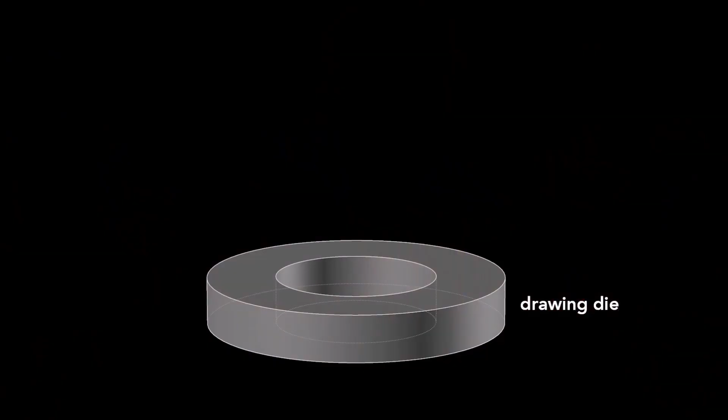The first step starts with a drawing die, on which sits the blank and then a blank holder that rests on top. We'll look at a slice of the die so we can see what's happening. A cylindrical punch presses down on the blank, forming the blank into a cup. This process is called drawing.

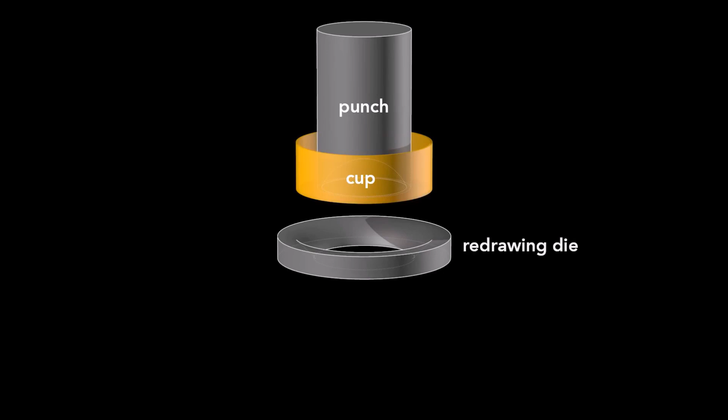This cup is about 88 millimeters in diameter, larger than the final can, so it's redrawn. That process starts with this wide cup and uses another cylindrical punch and a redrawing die. The punch presses the cup through the redrawing die and transforms it into a cup with a narrower diameter, which is a bit taller.

This redrawn cup is now the final diameter of the can, 65 millimeters, but it's not yet tall enough. A punch pushes this redrawn cup through an ironing ring. The cup stays the same diameter as it becomes taller and the walls thinner.

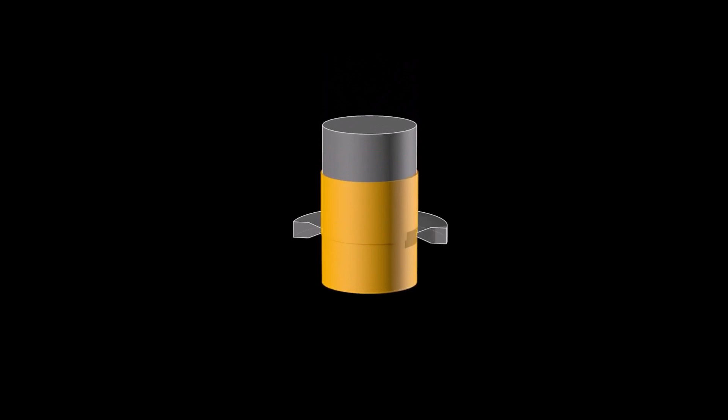If we watch this process again up close, you see the initial thick wall and then the thinner wall after it's ironed. Ironing occurs in 3 stages, each progressively making the walls thinner and the can taller.

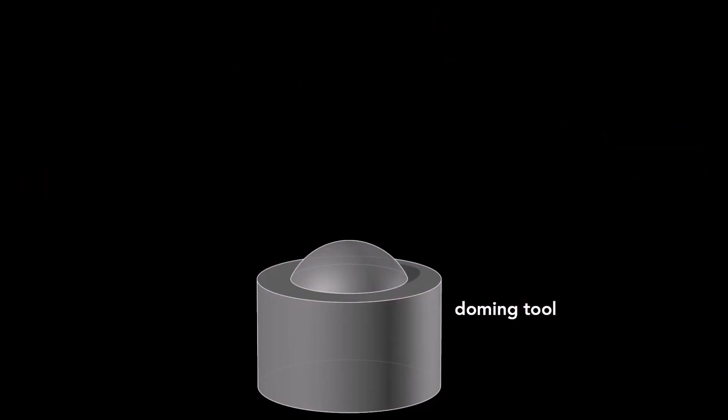After the cup is ironed, the dome on the bottom is formed. This requires a convex doming tool and a punch with a matching concave indentation. As the punch presses the cup downward into the doming tool, the cup bottom then deforms into a dome.

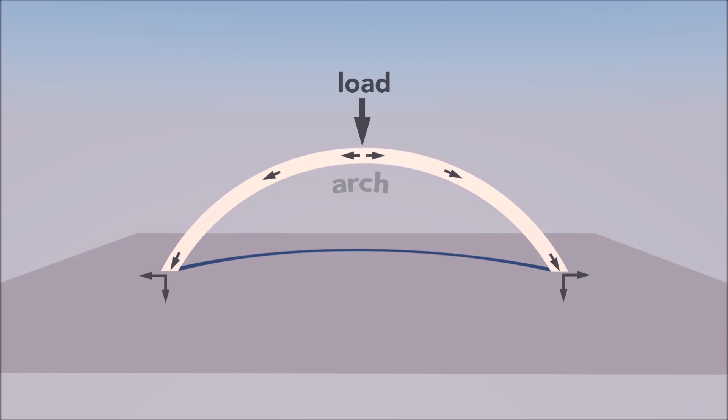That dome reduces the amount of metal needed to manufacture the can. The dome bottom uses less material than if the bottom were flat. A dome is an arch revolved around its center. The curvature of the arch distributes some of the vertical load into horizontal forces, allowing a dome to withstand greater pressure than a flat beam.

On the dome, you might notice 2 large numbers. These debossed numbers are engraved on the doming tool. The first number signifies the production line in the factory, and the second number signifies the body maker number. The body maker is the machine that performs the redrawing, ironing, and doming processes. These numbers help troubleshoot production problems in the factory.

In that factory, the manufacturing of a can takes place at a tremendous rate. These last 3 steps, redrawing, ironing, and doming, all happen in one continuous stroke and in only 1/7 of a second. The punch moves at a maximum velocity of 11 meters per second and experiences a maximum acceleration of 45 Gs. This process runs continuously for 6 months, or around 100 million cycles, before the machine needs servicing.

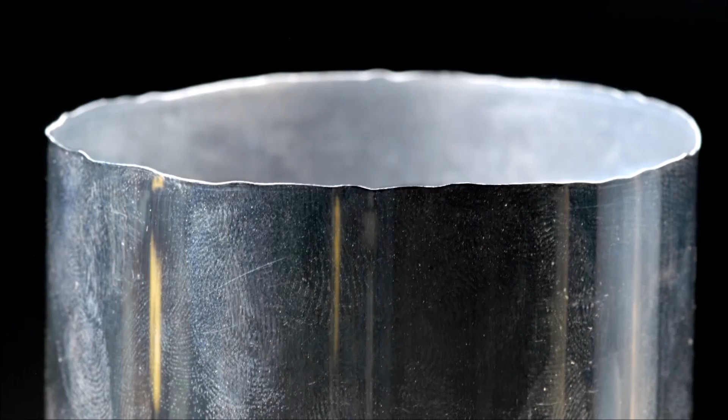Now, if you look closely at the top of the can body, you see that the edges are wavy and uneven. These irregularities occur during the forming. To get a nice, even edge, about 6 millimeters is trimmed off of the top. With an even top, the can can now be sealed.

But before that sealing occurs, a colorful design is printed on the outside. The term of art in the industry is decoration. The inside also gets a treatment. A spray-coated epoxy lacquer separates the can's contents from its aluminum walls. This prevents the drink from acquiring a metallic taste and also keeps acids in the beverage from dissolving the aluminum.

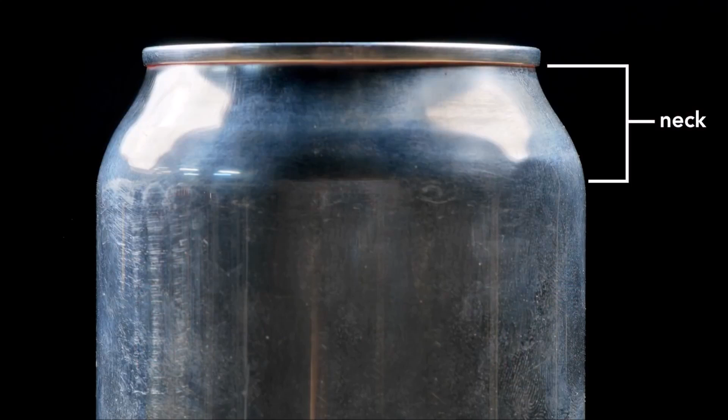The next step forms the can's neck, the part of the can body that tapers inward. This necking requires 11 stages. The forming starts with a straight-walled can. The top is brought slightly inward, and then this is repeated further up the can wall until the final diameter is reached. The change in neck size at each stage is so subtle that you can barely tell a difference between one stage and the next.

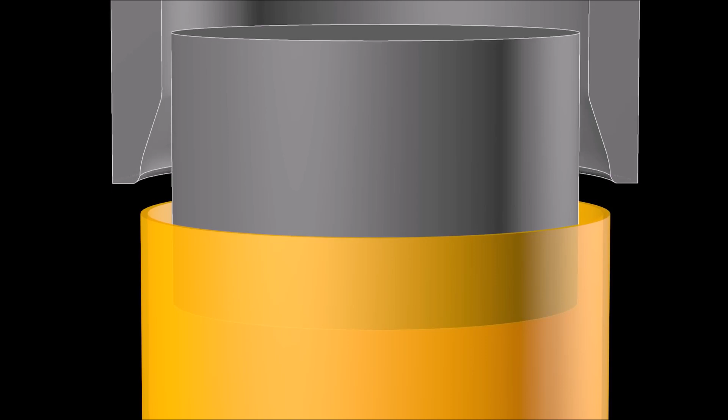Each one of these stages works by inserting an inner die into the can body, then pushing an outer die, called the necking sleeve, around the outside.

The necking sleeve retracts, the inner die retracts, and the can moves to the next stage. The necking is drawn out over many different stages to prevent wrinkling or pleating of the thin aluminum.

Since the 1960s, the diameter of the can end has become smaller by 6 millimeters, from 60 millimeters to 54 millimeters today. This seems a tiny amount, but the aluminum can industry produces over 100 billion cans a year, so that 6 millimeter reduction saves at least 90 million kilograms of aluminum annually. That amount would form a solid cube of aluminum 32 meters on a side. Compare that to a 787 Dreamliner with a 60-meter wingspan.

Now, after the neck has been formed, the top is flanged. That is, it flares out slightly and allows the end to be secured to the body, which brings us to the next brilliant design feature, the double seam.

On older steel cans, manufacturers welded or soldered on the ends. This often contaminated the can's contents. In contrast, today's cans use a hygienic double seam, which can also be made faster. This can is cut in half so you can see the cross-section of the double seam.

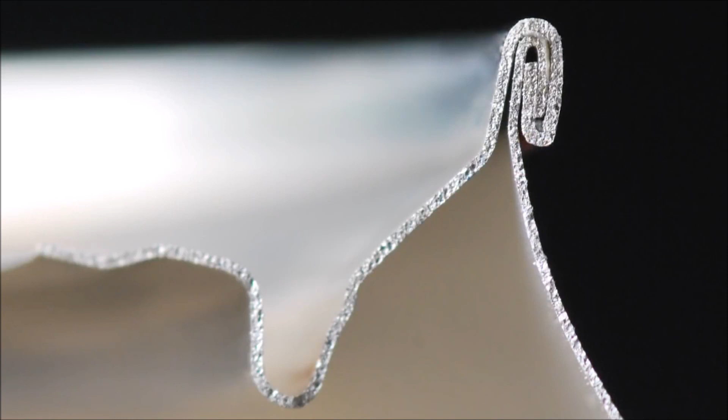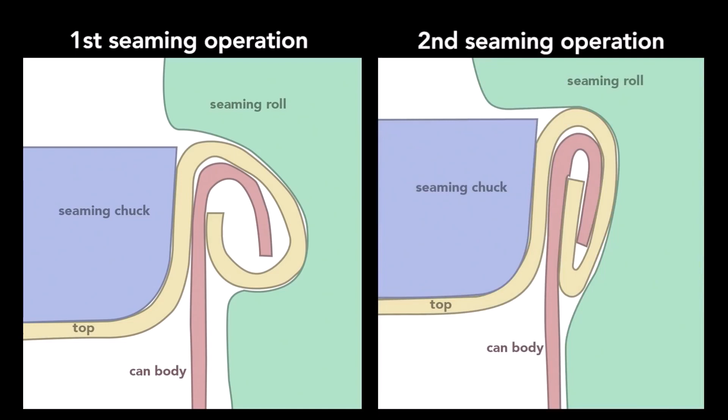To create this seam, a machine uses two basic operations. The first curls the end of the can cover around the flange of the can body. The second operation presses the folds of the metal together to form an airtight seal. While the operations themselves are simple, they require high precision. Parts misaligned by a small fraction of a millimeter cause the seam to fail.

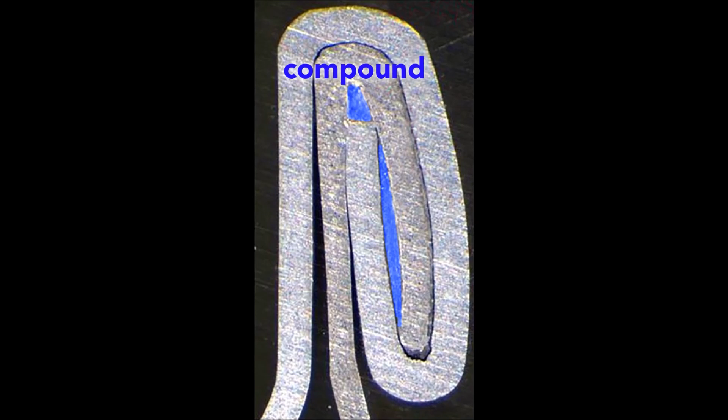In addition to the clamping of the end and can body, a sealing compound ensures that no gas escapes through the double seam. The compound is applied as a liquid, then hardens to form a gasket. The end, attached immediately after the can is filled, traps gases inside the can to create pressures of about 30 psi, or 2 times atmospheric pressure.

In soda, carbon dioxide produces the pressure. In non-carbonated drinks like juices, nitrogen is added. So why is a beverage can pressurized? Because the internal pressure creates a strong can despite its thin walls.

Squeeze a closed, pressurized can, it barely gives. Then, squeeze an empty can. It flexes easily. The can walls are thin, only 75 microns thick, and they're flimsy. But the internal pressure of a sealed can pushes outwards equally and so keeps the wall in tension.

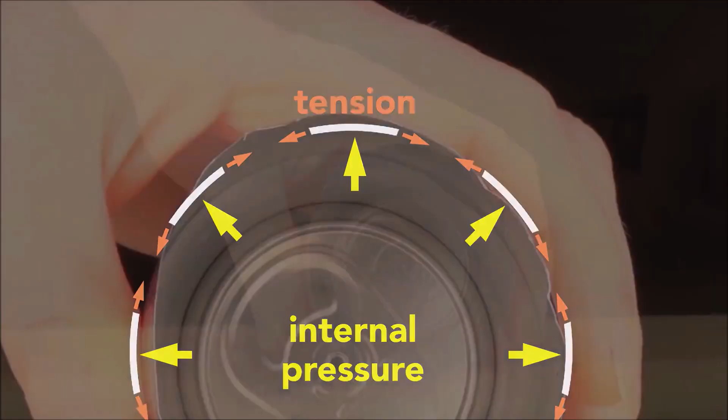This tension is key. The thin wall acts like a chain. In compression, it has no strength, but in tension, it's very strong. The internal pressure strengthens the cans so that they can be safely stacked. A pressurized can easily supports the weight of an average human adult. It also adds enough strength so that the can doesn't need the corrugations like in this unpressurized steel food can.

While initially pressurized to about 2 atmospheres, a can may experience up to 4 atmospheres of internal pressure in its lifetime due to elevated temperatures, and so the can is designed to withstand up to 6 atmospheres or 90 psi before the dome or the end will buckle.

Why is there a tab on the end of the can? It seems a silly question. How else would you open it? But originally, cans didn't have tabs. Very early steel cans were called flat tops for pretty obvious reasons. You use a special opener to puncture a hole to drink from and a hole to vent.

In the 1960s, the pull tab was invented so that no opener was needed. The tab worked like this. You lift up this ring to vent the can and pull the tab to create the opening. Easy enough, but now you've got this loose tab.

The cans ask you to please don't litter, but sadly these pull tabs got tossed on the ground where the sharp edges of the tabs cut the bare feet of beachgoers or they harmed wildlife. So the beverage can industry responded by inventing the modern stay-on tab.

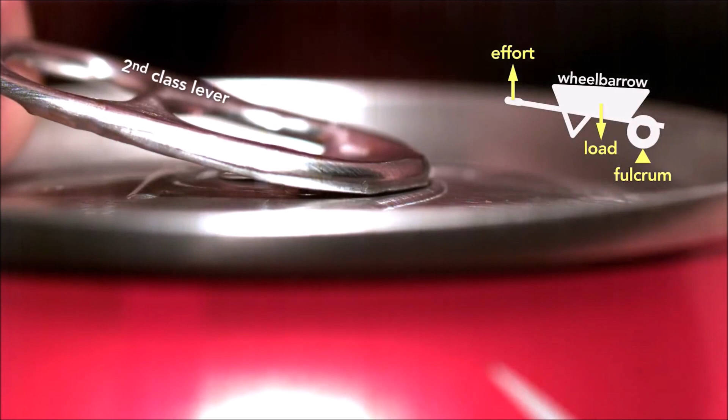This little tab involved clever engineering. The tab starts as a second-class lever, like a wheelbarrow, because the tip of the tab is the fulcrum and the rivet is the load. The effort is being applied on the end.

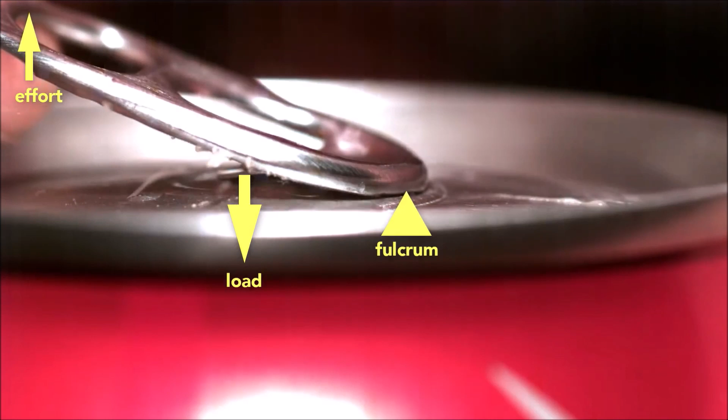But here's the genius part. The moment the can vents, the tab switches to a first-class lever, which is like a seesaw, where the load is now at the tip and the fulcrum is the rivet.

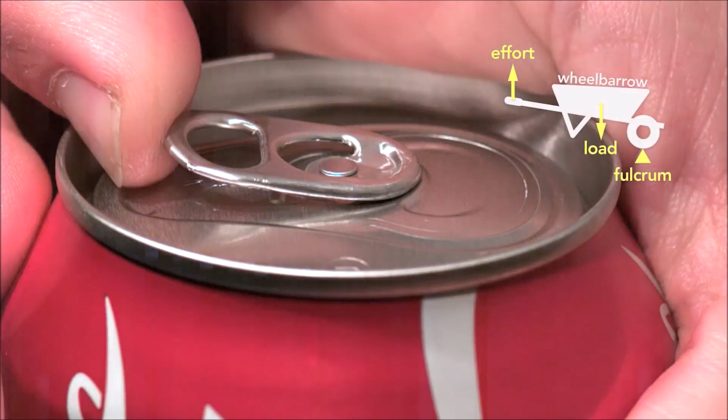You can see clearly how the tab, when working as a wheelbarrow, lifts the rivet. Part of the reason this clever design works is because the pressure inside the can helps force the rivet up, which in turn depresses the outer edge of the top until it vents the can, and then the tab changes to a seesaw lever.

Looking from the inside of the can, you can see how the tab first opens near the rivet. If you tried to simply force the scored metal section into the can using the tab as a first-class lever, with the rivet as the fulcrum throughout, you'd be fighting the pressure inside the can. The tab would be enormous and expensive.

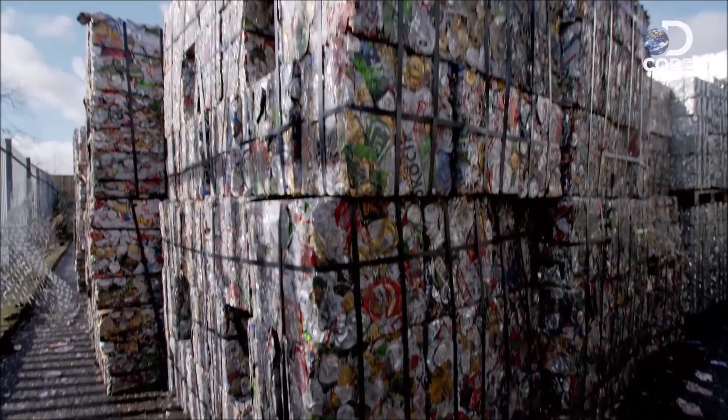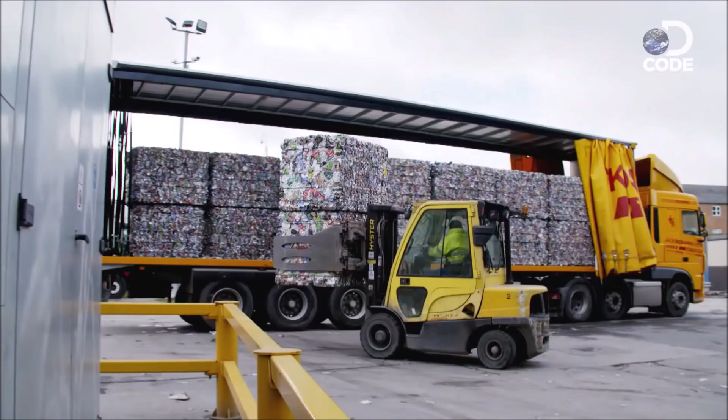Novelis is the world's largest recycler of used beverage cans. They arrive at its factory in Warrington, England from all over the world, compressed into bales, each weighing up to 1,000 kilograms and containing as many as 65,000 aluminium cans.

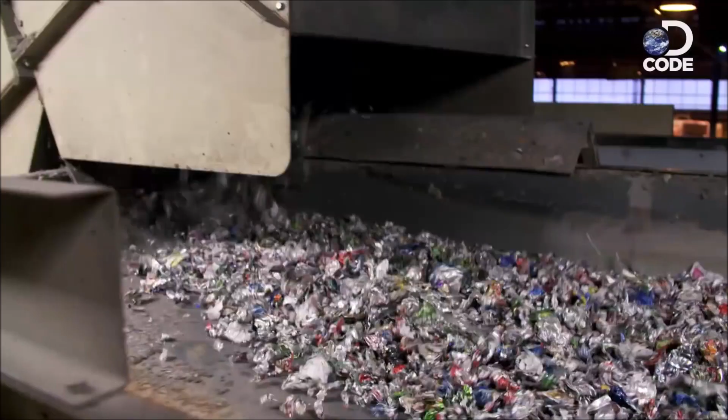The bales of compressed cans are loaded onto a conveyor and fed into a 340 horsepower shredder. Aluminium is tricky to sort because, unlike some metals, it can't be separated out with a magnet.

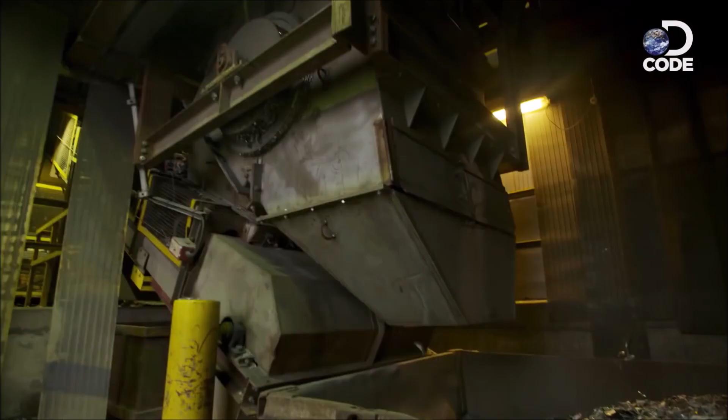So next, the shredded scrap passes through an optical sorter at a rate of 3 meters per second. The machine uses infrared sensors to sort out what's metal and what isn't, then blasts away any plastic or glass with jets of air. A powerful magnet sucks up any scraps of steel, leaving just aluminium.

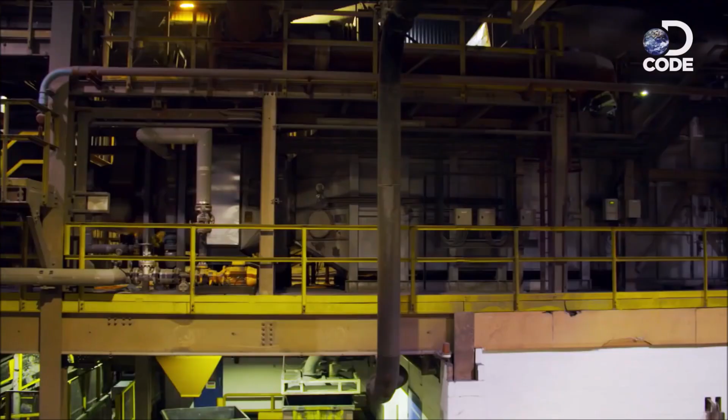The next problem is aluminium doesn't melt until 660 degrees. The paint and lacquer aren't so lucky - they're instantly vaporized. Then the clean aluminium chips are ready for the next stage, melting.

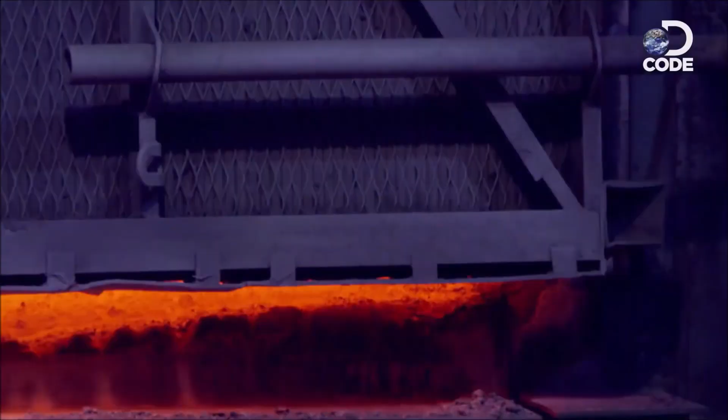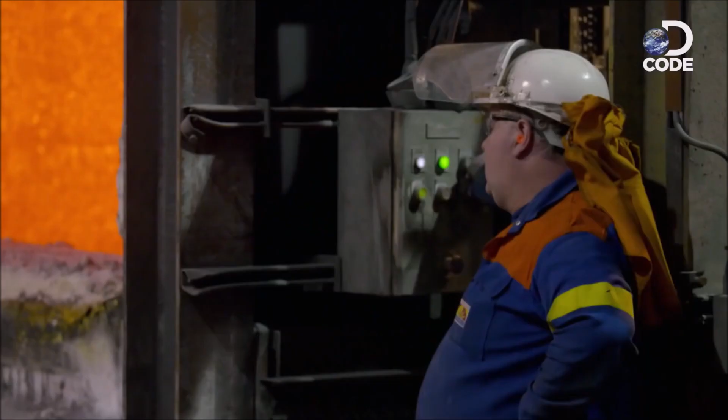Two furnaces hit a blistering 730 degrees and handle up to 100 tons of aluminium each. The trouble is, when the aluminium melts, it reacts with air, forming a layer of aluminium oxide that floats on top.

This unwanted oxide is known as dross. A brave furnace operator skims it off with a giant steel spatula. And the alloy is ready for the casting area.

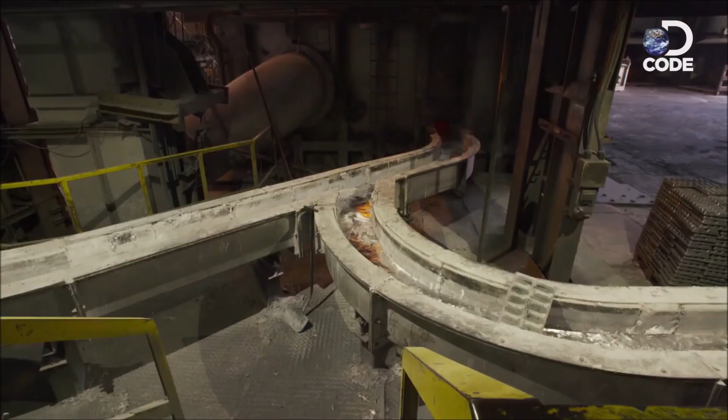The only problem is getting there. A river of molten metal flows downhill to a holding furnace that's the size of a double-decker bus. Somehow, they need to pour the liquid metal into a mould. Remarkably, the solution is to tip the entire furnace.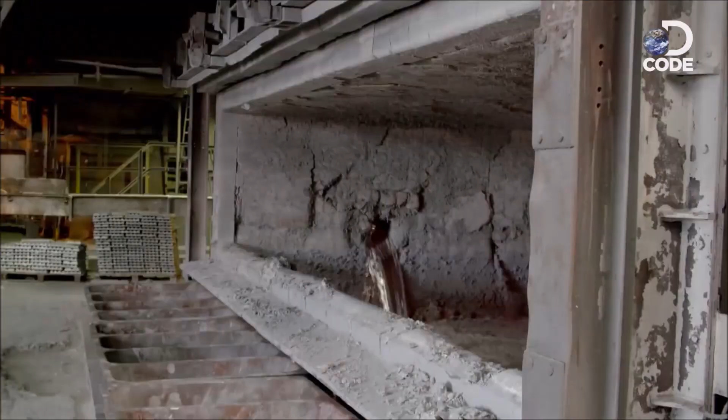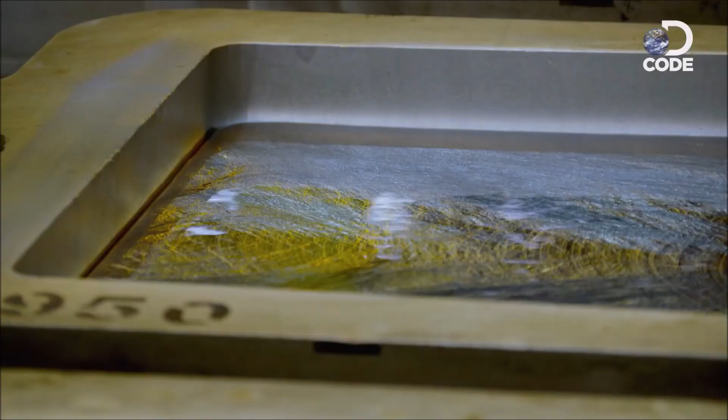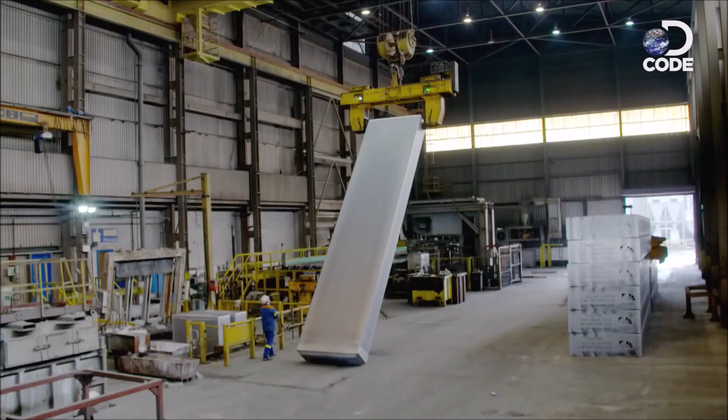A fountain of deadly metal pours into one of 3 moulds set 10 metres into the ground. Inside, they will be cast into 3 towering blocks of aluminium. After 2.5 hours, they have 3 giant aluminium monoliths, called ingots. Each one is 10 metres long, weighs 27 tonnes, and is made up of 1.5 million recycled cans.

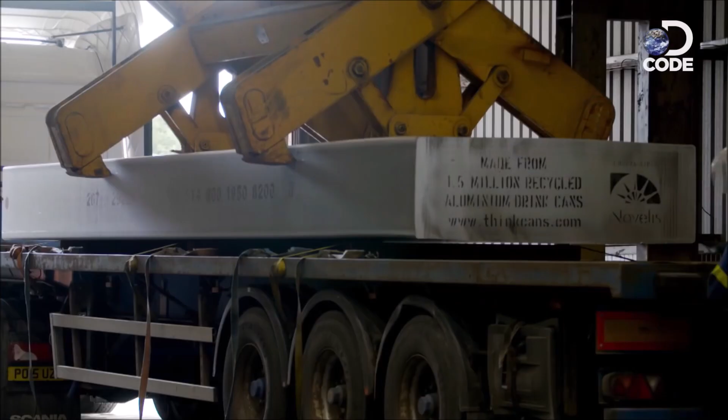Today, demand for aluminium is so high, the ingots don't lie around. Their transformation back into cans starts with a 900-kilometre journey to a rolling mill in Germany.

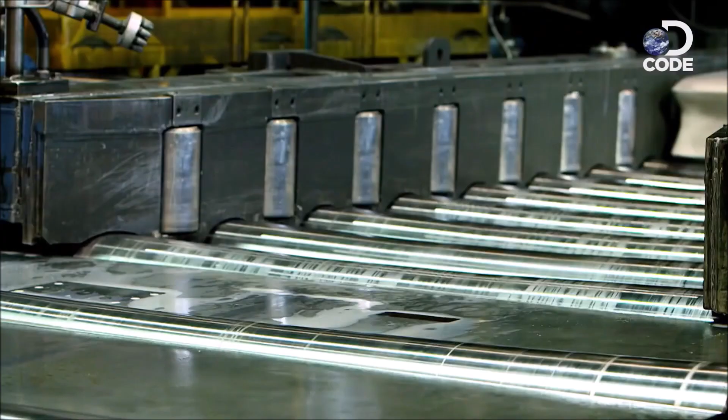Here, they're heated in another furnace to 525 degrees. This relaxes the bonds between the aluminium atoms, releasing any stresses within the ingot. Then it's passed back and forth through a series of rollers. It's a bit like rolling pastry.

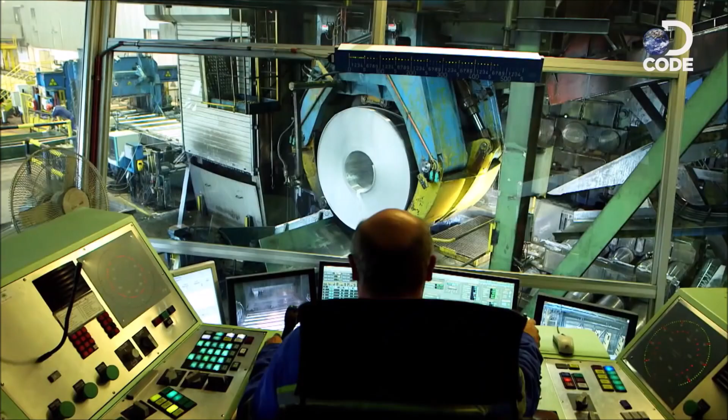Each set of rollers thins out the metal until it's 1/4 millimetre thick and 10,000 metres long. That's 1,000 times its original length.

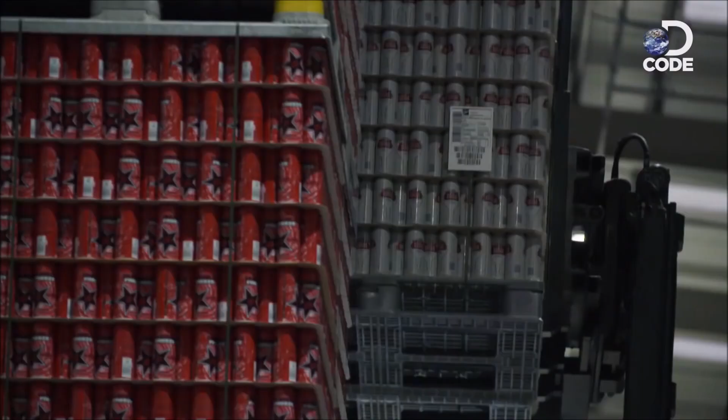Massive reels of the aluminium arrive back in the UK at Ball Packaging to undergo reconversion into cans. They produce around 6.5 million cans here every day and send them all over the world. That's a whole lot of aluminium. Luckily, there's plenty more where these came from.